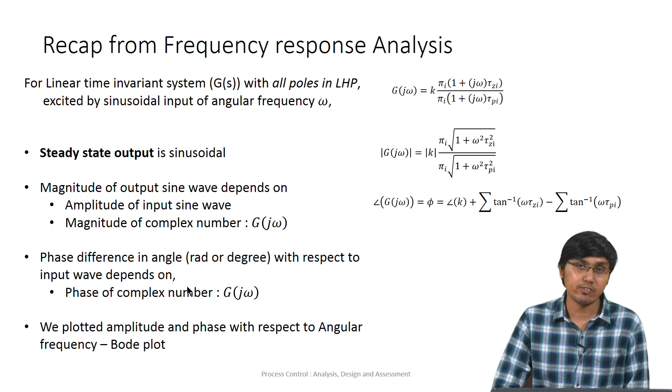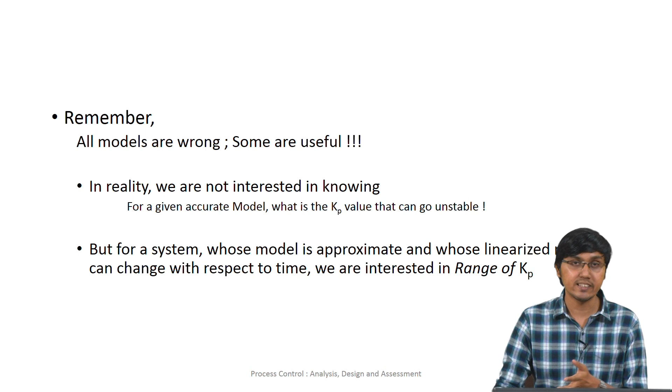We will also try to understand intuitively what happens in the general case, and towards the end we will try to see where this kind of analysis fails. So again, to summarize from the previous lecture: why are we interested in the range of Kp? Because the model itself, the transfer function itself, is an approximation. So we are not interested in the particular value of gain at which it goes unstable, but a qualitative understanding of what value of gain the system goes unstable. That's what this analysis will give us in a better way.

So now we again ask: when we say that when we increase the gain the poles are moving towards the right of the S plane, okay, but why does everything happen? Can we ask this question in a deeper sense? This frequency analysis helps give us some insight, but this insight is not a very strong insight, because this intuition is not straightforward and can fail at times, but it is okay to have this intuition to begin with.

The point we are trying to emphasize is this intuition is okay to have to begin with, but it is not a strong intuition and it can fail at times. Keep this point in mind, and we will see where it fails. So why does it go unstable? One thing we can say is whenever we have a pole on the right hand side of the S plane, we are going to have some positive lambda into t, and that causes an increase in the amplitude of a sine wave, and that is what makes it unstable. But why does this increase in amplitude happen?

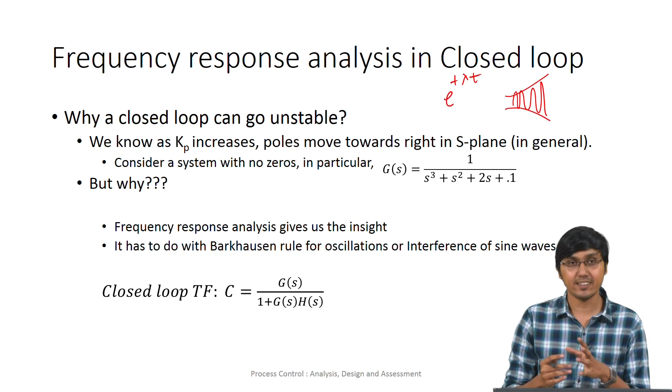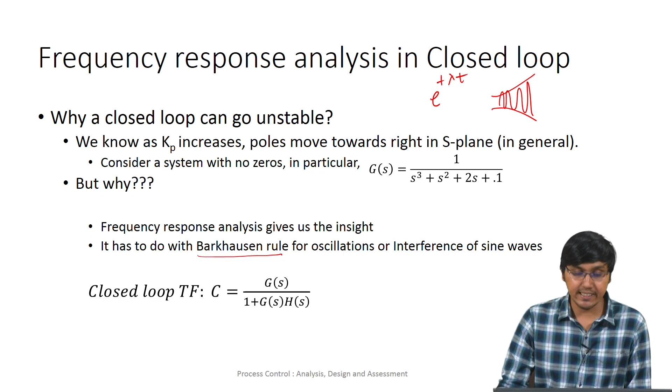If we ask this, there is a rule called Barkhausen's rule. In electronics, for creating an oscillator, we use this Barkhausen's rule. What it basically says is: in a system, for a particular frequency, if this frequency goes around the loop and comes back at the same point, and it is in phase with the input sine wave, and if the net gain of this wave, how much the magnitude has changed, is greater than or equal to 1, either increased in amplitude or the same amplitude, then this sine wave is going to go through the loop again and again.

So let us just run through it once and see how it goes. First, let us say we have a sine wave like this here, and then it goes around the loop, and let us say now the amplitude has decreased. Let us say the amplitude, the modulus of G of j omega at that particular angular frequency, is 0.5.

So when it comes back, let us say this is the frequency at which it goes through the loop and comes back in phase. If it comes in phase and is 0.5 in magnitude, then it becomes half of this, and the third time it goes around again and comes back, it becomes smaller again. So you can see when it goes around the loop, the amplitude is going to die down. This frequency will die down as time progresses; it's a stable system.

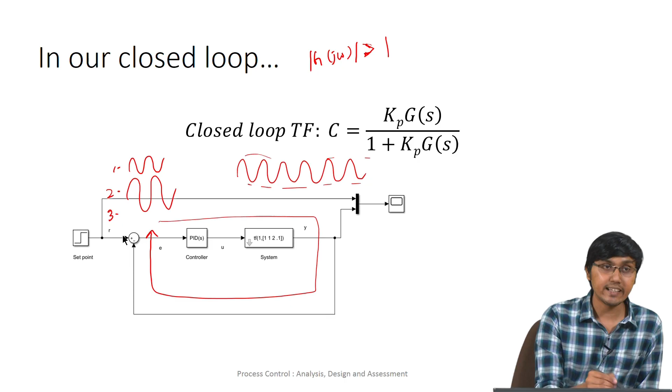And what happens if the gain is greater than 1? The next time it comes around the loop, this is going to increase, and the next time it is going to increase more. So if you plot the output, the amplitude keeps increasing. So this is the intuition that the Barkhausen criteria gives, and we are using this intuition for our analysis of stability.

Barkhausen says that the phase shift caused by this loop must be multiples of 2 pi, which is in phase, so after every 2 pi interval the sine wave is going to be in phase. So what does that mean? Sin omega t plus some multiple of 2 pi is again going to be sin omega t. So any multiple of 2 pi is going to become the same wave again and again.

So when this wave goes around the loop and comes back, if the phase lag introduced by the loop is a multiple of 2 pi, the sine wave is going to be in phase, and if at that particular frequency the gain is greater than or equal to 1, then it's going to oscillate. If it is equal to 1, it is going to be oscillating; if it is greater than 1, it is going to be oscillating with an increasing amplitude. If it is less than 1, the oscillations are going to die down, so it is a stable system.

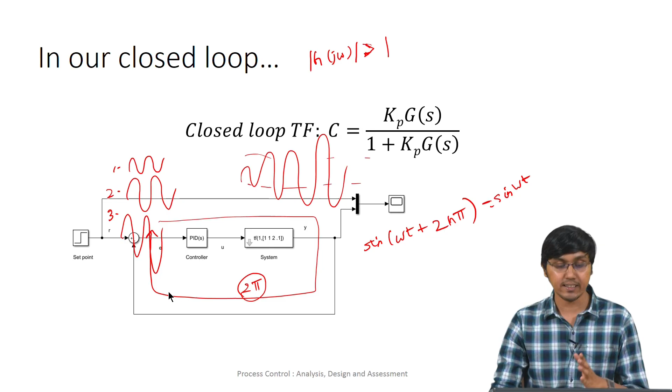So that is what Barkhausen says, and with Barkhausen's criteria, let us look at the Bode plot and see what happens. This is what we saw already; this is the summary of it. If it is in phase or a multiple of 2 pi, and the magnitude is greater than or equal to 1, that is when it is going to go to the unstable domain. Actually at equal to 1 it is still stable, it keeps oscillating; greater than 1 it is going to be unstable.

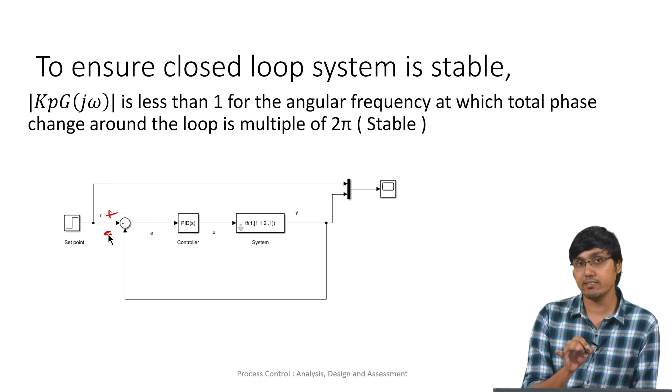So in our system, here we have a minus sign. We saw in our frequency response analysis that every minus sign is going to contribute a minus 180 degree phase shift. We did minus 1, saw the Bode plot, and saw it is minus 180 degrees. This minus sign is here because it is subtracting the output from the input. So one minus 180 degree phase shift is already there.

So for a wave that comes out through the loop and comes to the same point again, one thing is minus 180 degree is already there due to this minus sign, and then there is also a phase lag that is contributed by this system, and this phase lag is nothing but the angle contributed by the complex number G of j omega.

So for some particular frequency, if this angle of G of j omega is going to be minus 180 degree, then this minus 180 degree due to this particular system and this minus 180 degree are going to get added to be minus 360 degree, which is a multiple of 2 pi. So this particular frequency at which the phase angle is minus 180 degree is of some importance, and we call it the critical frequency.

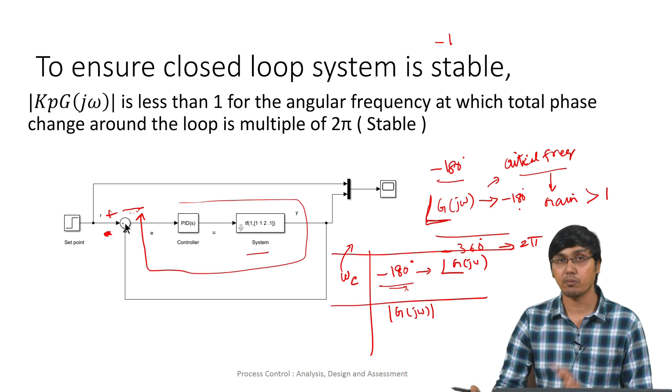And why minus 180 degree? Because the minus sign contributes another minus 180 degree, so totally we get minus 360 degree, which is a multiple of 2 pi, and the Barkhausen condition is satisfied. So here if you do the Bode plot, we see at what frequency the system has a minus 180 degree phase shift. That is at omega equal to 1.41 radians per second. So that is the omega c value here.

The frequency at which the phase is minus 180 degree is the critical frequency, in this case 1.41 radians per second, and at this frequency we look at the amplitude. Remember, in the Bode plot it is in dB. 0 dB means gain is 1, because dB is 20 log of the gain, and log 1 is 0. Anything less than 0 dB is negative, which in logarithmic scale means less than 1.

So if mod G is less than 1, you get a minus value here, so the gain is less than 1. So in this system, at the critical frequency, when the phase shift is minus 180 degree, the gain is less than 1. So the first conclusion we can make is the gain is less than 1, so the system is stable.

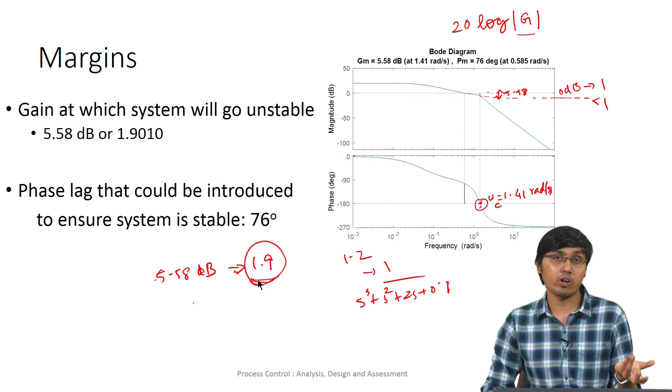So basically, considering all the approximations, I am saying I have a flexibility of making a mistake of 1.9 times the gain. Only if I multiply by a gain of 1.9 will the system go unstable. So this is the bandwidth I have. Till I multiply by 1.9 times the gain, I am not going to go unstable. So that is what we are going to tell there. This bandwidth or this margin, we call it the gain margin.

I have a stable system. How much gain can I multiply and still be stable? That maximum gain is what's called the gain margin. So it is nothing but 1.9, and in decibels it's 5.58 dB. It's actually a multiplicative gain, but when we convert into decibels, if it is a multiplication k into G, when you take the logarithm it becomes log k plus log G. So the decibels tell how much gain you are going to add. Remember, when you give the gain in decibels, you are telling how much gain in decibels I can add.

Because when we take the logarithm, multiplication becomes plus. So on a logarithmic scale, it becomes addition. That's something you can remember. But leaving aside all the logarithm mathematics, what we are asking is what is the gain I can multiply such that the system will still be stable. What is the maximum gain I can multiply and still the system will be stable? That is what you are going to ask.

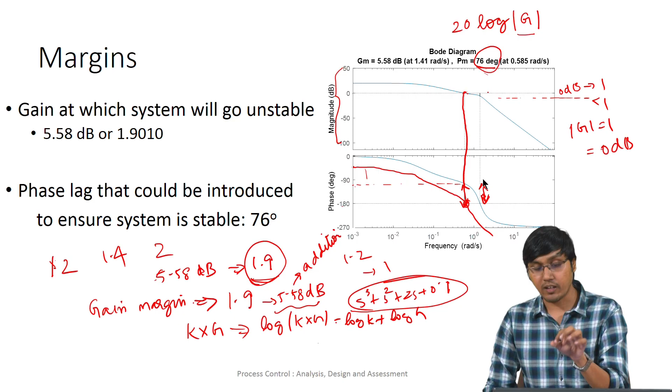So what is the phase I have to add to make the system unstable? That is what is called the phase margin. So to summarize everything, fix the phase plot and ask the question at minus 180 degrees. Why minus 180 degrees? Because with the negative sign in the feedback loop it becomes minus 180 degrees plus this minus 180 degrees, so minus 360, multiples of 2 pi. So at minus 180 degrees, whatever is the angular frequency, that frequency is called the critical frequency. That is the first point we observe.

Then we ask what is the gain at this particular critical frequency, and if the gain is less than 1, then the system is stable. We do not stop there; we ask what gain we have to multiply to make the system unstable. That gives us the bandwidth: we can multiply this much gain so that the system will still be stable. We got that as 1.9. That is nothing but the gain margin. 1.9 is 5.58 in decibels, so 5.58 decibels is the gain margin.

Now we fix the gain plot and ask what is the phase lag I have to introduce so that the system goes unstable. That is given at 0 dB, because Barkhausen says the gain should be equal to 1. So when it becomes 1, what should I do to shift this to become minus 180 degrees? What is the phase lag I have to introduce to make this phase minus 180 degrees at the value where the gain equals 1? That is called the phase margin.

So what is the maximum phase lag I can introduce so that the system will still remain stable? That is called the phase margin. Here it is 76 degrees, and as you can clearly see, a higher gain margin and a higher phase margin tell me that I am safe, because I can multiply by a big number and I am still stable. I can introduce a big phase lag and I am still stable.

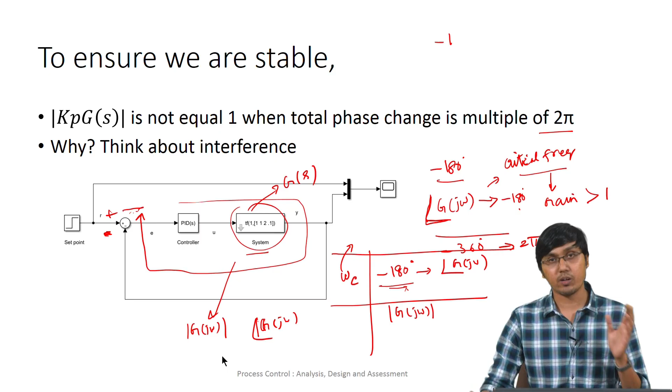So basically we are plotting for an open loop, and then we are saying okay, in the open loop if the phase lag is minus 180 degrees and the amplitude of the gain is equal to 1, etc., then what happens. So for the Bode plot we use the open loop transfer function, and for this margin analysis also we use the open loop transfer function. That's something you have to remember. It's not the closed loop transfer function we are using here.

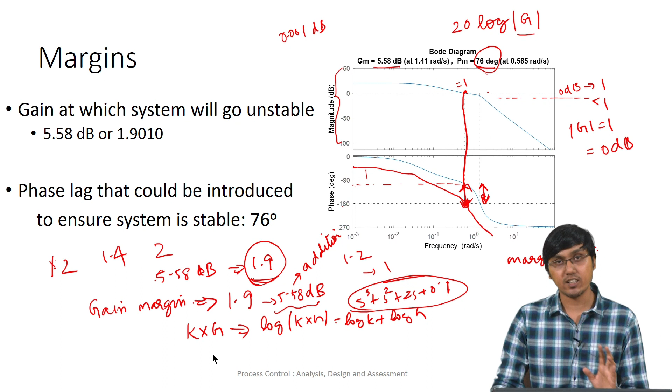Then I said okay, this method is not foolproof, it can fail. So we will see some examples that clearly show that this method is not going to work all the time. So you take the transfer function 10(s + 1)² / s³. This is the open loop transfer function again, and then you plot the Bode diagram, and you see it says the gain margin is at minus 180 degrees. So it means that the gain is already greater than 1.

So 0 dB is the line when the gain is 1, and this is the critical frequency. Critical frequency is when we have minus 180 degree phase shift. So at this critical frequency the gain is going to be greater than or equal to 1. So by Barkhausen's condition it means that the system should be oscillating, right? But let us see what happens. If you give a step input, the system is not oscillating, it actually goes and settles here. So this method is not foolproof.

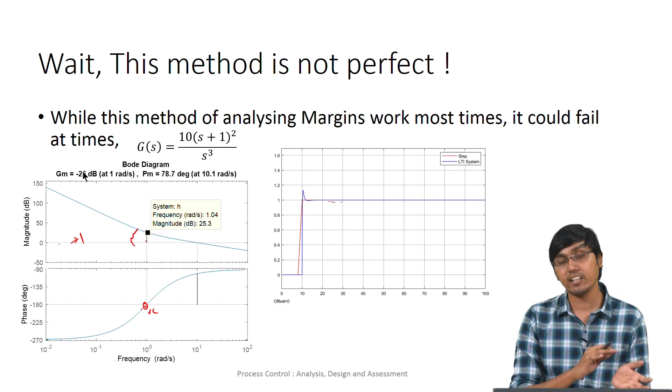This method will actually fail in certain special cases, but it is still working for a lot of systems. So what is the exact problem here? There is another example that I can show you, but for most systems this gain margin and phase margin concept works fine, but not all the time. So here you can see its gain is still greater than 1, the gain margin in dB is a negative number, which means that it is unstable, but you can see the system is stable here.

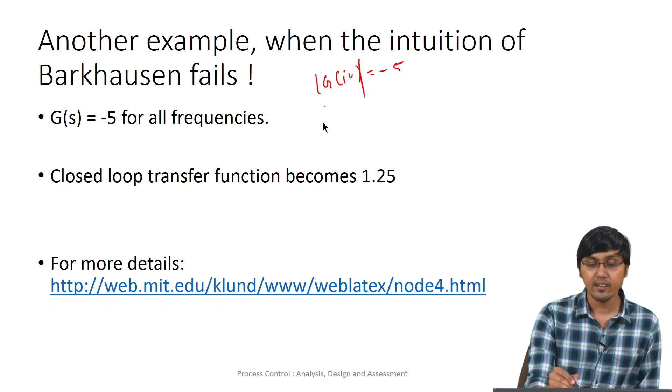So another example is if you take G(s) = -5, then G(jω) is equal to minus 5 for all frequencies, and the angle of G(jω) is minus 180 degrees, because the minus sign contributes the minus 180 degree phase lag. And the modulus is always positive, the modulus is 5, and this again pushes us to intuitively feel this system is going to be unstable.

But if you write the closed loop transfer function G(s) / (1 + G(s)), what happens? It's minus 5 by minus 4, which is 1.25. So this is stable. If you give a step input, the output is going to be 1.25 times the input. It's a stable system. So this has some problem. This gain margin and phase margin thing and Bode diagrams help us to understand intuitively what exactly happens, why it can go unstable, but it's not always true. Sometimes it fails. That's something you have to keep in mind.

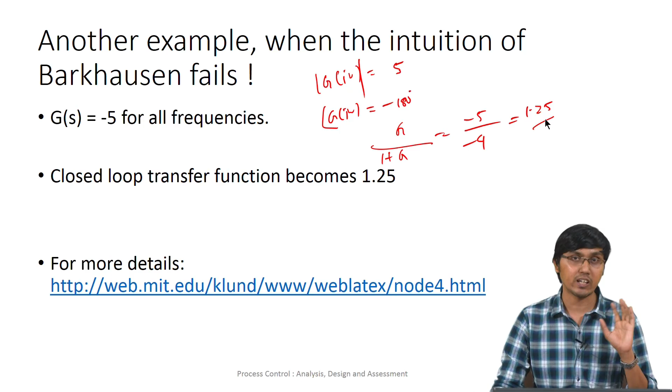So now we go to the next concept called the Nyquist stability criterion, which we will do in a separate lecture. Even in the lectures by the professor, he has explained Nyquist stability in a detailed manner. So we will run through some examples of Nyquist stability, and see whether it can answer all these questions of stability, and whether it can handle all these problems faced by the Bode plot, etc. That's what we are planning for the next lecture.

And I also request you to take some transfer function and play with it, draw the Bode diagram of it, use MATLAB to find gain margin and phase margin, do the root locus of it, and solve the problem by creating the closed loop transfer function and seeing the poles of the closed loop transfer function. So play around with all these things. All three techniques should give the same answer; the answer should not change based on the technique you follow. Try it out yourself, and you will actually start enjoying all these things. So that's what I ask you to do.